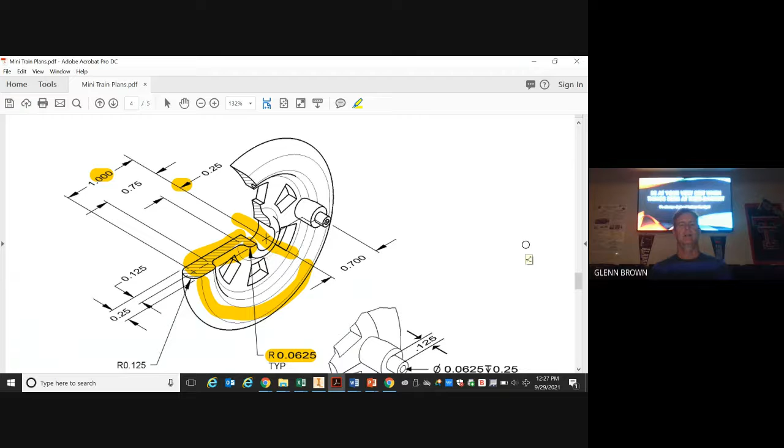We're working our way through this miniature train project, and I had a request to show the wheel, how to design or how to draw the wheel. When I first saw it, it looked complicated when I was first learning this, but it turns out it's not. Like everything else, there's just a few little tricks you got to figure out.

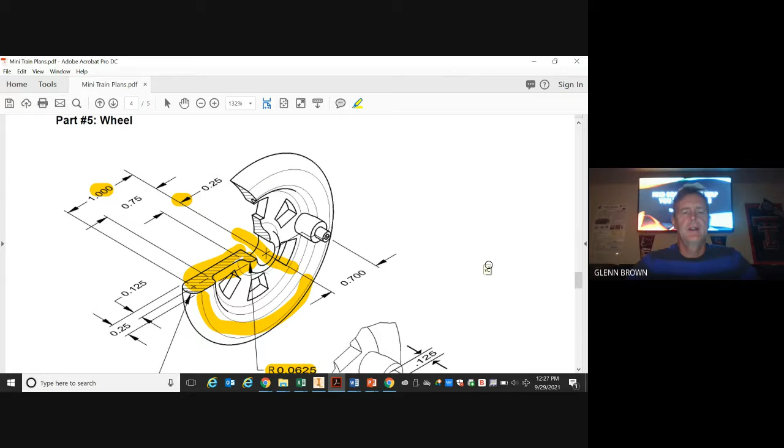So the first of those is how to draw it. Once again, when you're looking at things, you got to look at it and decide what the best way to draw it is. So on this one, you might say, well, I'll draw a circle and then I'll extrude it and then I'll cut these holes into it. And you could do that. You could spend a whole lot of time filleting and cutting this hole in and then copying that around.

But the most efficient way that I found was to use a revolve, just drawing this half of the wheel and then revolving it around. And so all you're going to do is just use lines and a circle and the fillet command. Nothing too tricky about that. All stuff that you've used in the past.

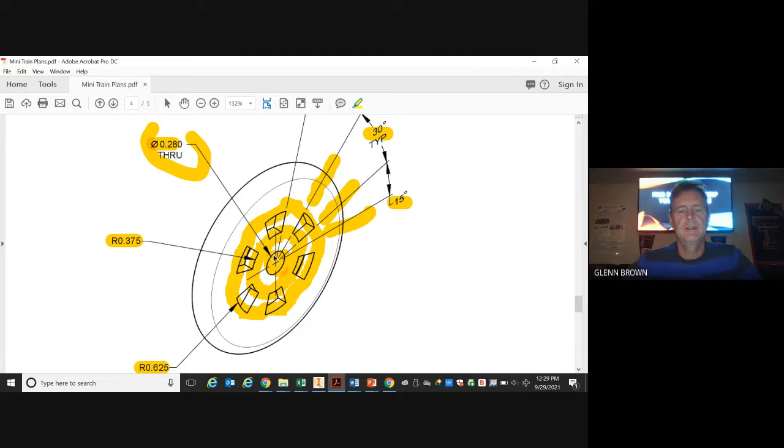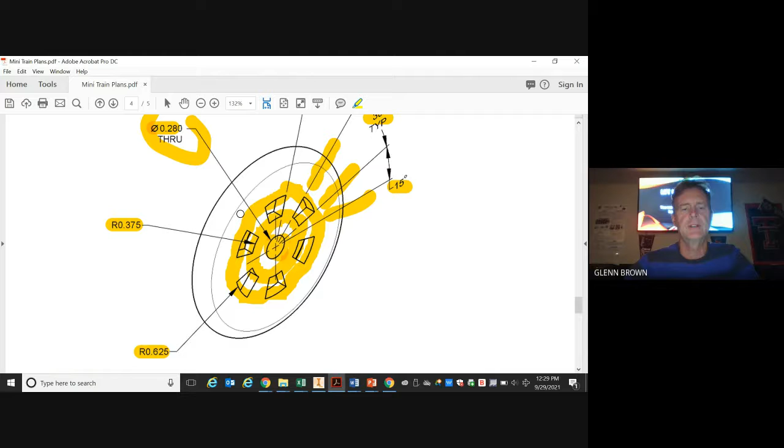One thing that you're going to notice here is when you start trying to draw this first line, there's no dimension telling you what the distance is there. In order to do that, you have to look further down here at the back of the wheel, and the back of the wheel shows that this hole is the same as this hole. So on the drawing, they give you the diameter. Remember, the circle with the line through it is diameter of 0.280. And they have a note there that it goes all the way through. So that's your measurement for the center line to the first line.

All right. So first we'll draw a line here, here, here. We'll draw a circle here. I like to just put some random lines in and then come back and dimension them, and then dimension that distance for the circle, and then draw in these two lines here, and then revolve. So let's get started. We'll do this in two parts. The first part will just be drawing the wheel. The second part will be drawing the slots and this hub for the linkage arm afterwards.

So first, like always, we'll go into Inventor. We're using Inventor here, but these techniques are very usable on other types of solid modeling software. So File, New, Standard IPT. We'll open up a new file now. So now we've got a new environment to draw our part in. As always, we're going to start with a 2D sketch, and we're going to choose our plane to draw in. So remember, top, front, right side.

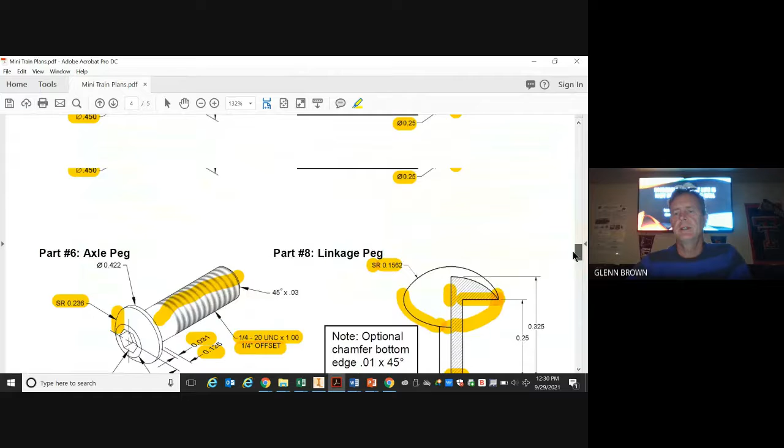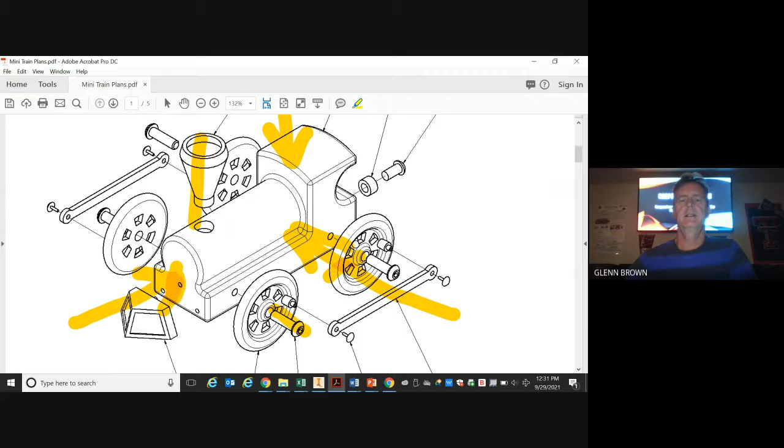We have to decide which plane to draw it in. So if we go back and look at the drawing, and we go up to the assembly, we see that the wheel is positioned this way on the train itself. So remember, we have front, top, and right side. Since we're just going to draw that one part right there and then revolve it, it looks like it'll be best for us to draw from the top view.

So we'll go back to our file. We'll click the top view. Remember that because of the coordinate system of Inventor, it typically turns 90 degrees when you click the top view, and you just have to go over here to the side and rotate it back to where it says top the way it should.

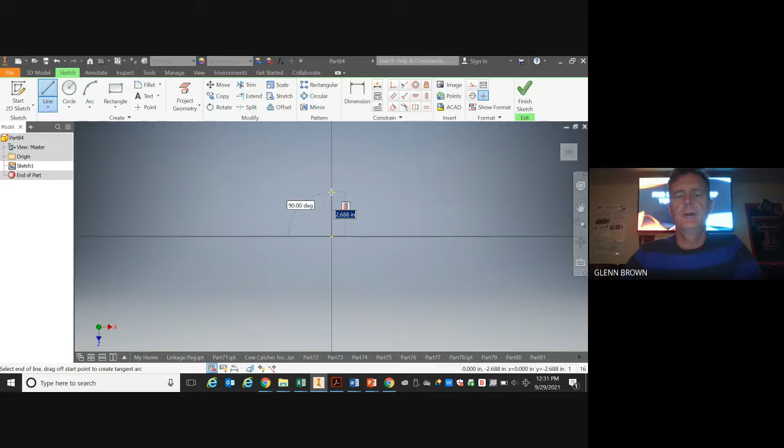All right, so now we're ready to go. So like I said, I usually just come in and I draw several random lines. I start at 0, 0, but the length is random. So I've got that one. That one will eventually be used for my revolution, my axis to revolve around.

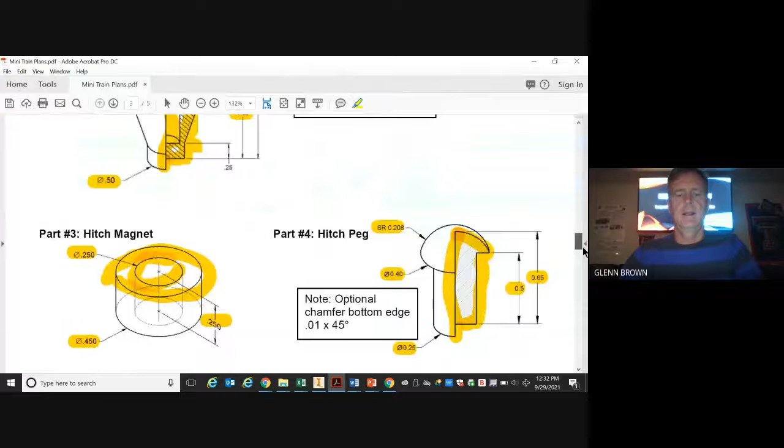Then I'm going to put another line in here. Right click and OK. And then I'm going to put one more. Right click OK. And then one more down here. Okay. After that, and these lines, I'm not dimensioning the length of them or anything. I'm just drawing these that are, if you look at the drawing, you can see that the overall width of this part is only going to be 0.25.

So any line that's greater than about 1 inch is going to be fine. So when you're drawing these lines, just draw them longer than 1 inch and you should be okay. All right, so now I'm going to draw a circle, and from the drawing we can see that this circle, this is a semicircle here, but we'll make that semicircle out of a complete circle, and you can see here that it gives the dimension of 0.25. That would be the diameter of the circle.

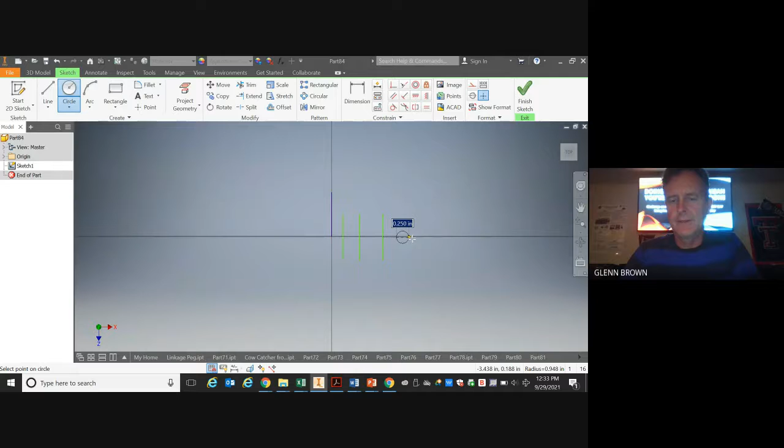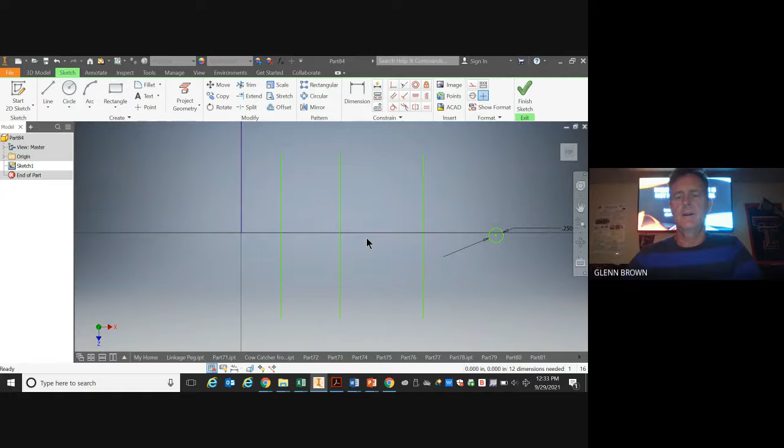So if I go back here, I've got my circle command. I come out here and just put my center on the axis here. And then I just come out and key in 0.25, because remember that Inventor draws circles in diameters and not in radius. So 0.25. All right, so now I've got all the things I need to take care of this first step. Now I'm just going to go in and dimension them.

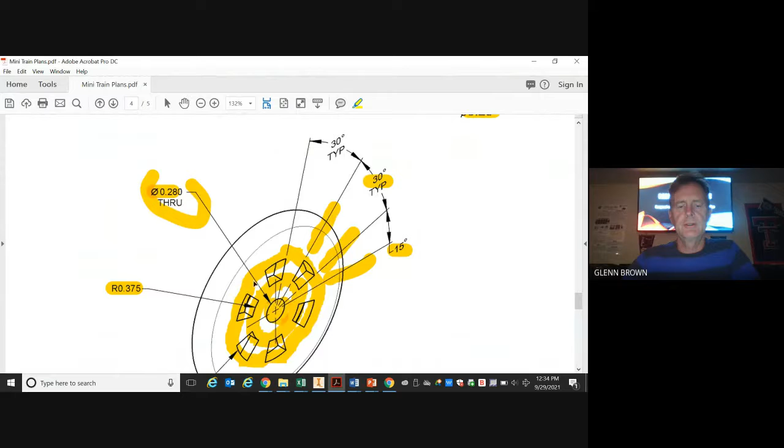So if we look at the drawing, remember what we said down here, that this hole that goes through at the center is 0.208. It's a diameter of that. So this distance here is going to be half of 0.208. So I'll dimension from the center line to that line. I'll make it 0.208 and then I'll divide it by 2, because we're only drawing half of the wheel, and then we're going to revolve it into its full measurement. So I've got that. Now I'm going to dimension the next one.

So the next one, some of my students make the mistake of dimensioning. They don't dimension from the center line. They dimension from the line we just drew. And so just make sure you're careful of that. Make sure that you notice that all of these dimensions, the 0.25, the 0.75, and the 1.0 that we're about to dimension, all those dimension lines are originating from that center line, okay? So let's go in and dimension our next one.

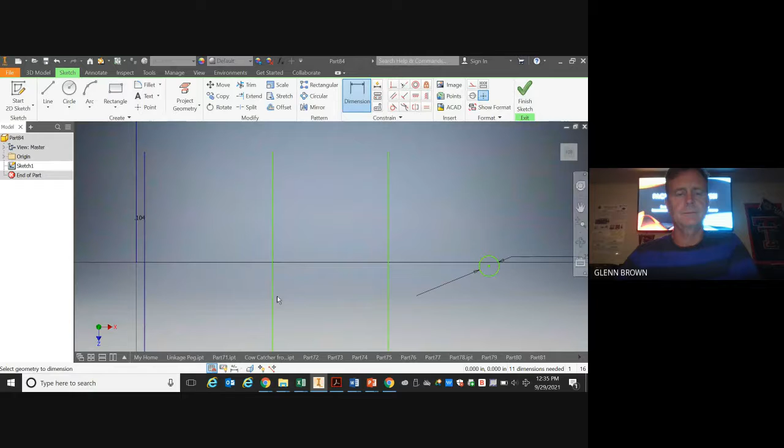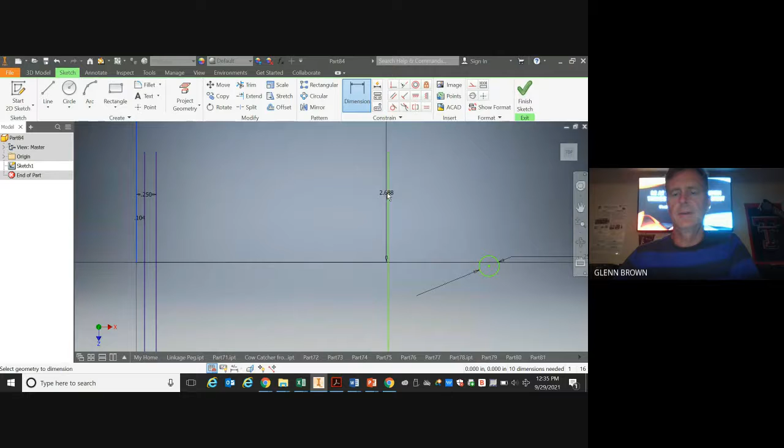So the next one will be from here to here, and that is going to be 0.25. And then the next one, looking at our drawing, will be 0.75, which will give us that edge there. So from the center out to here, 0.75. And then lastly, the circle.

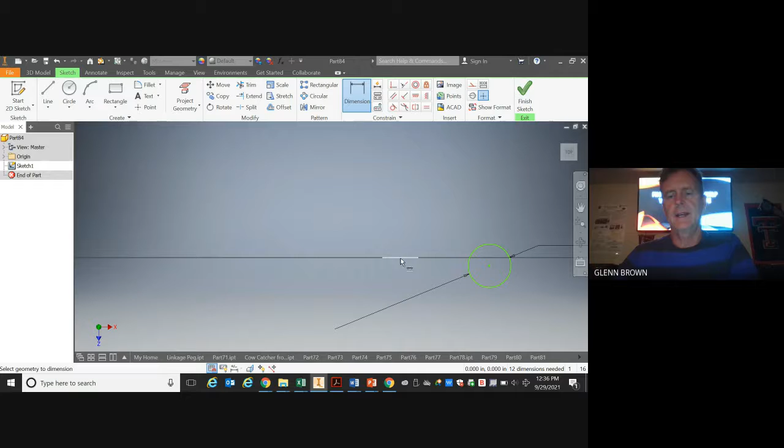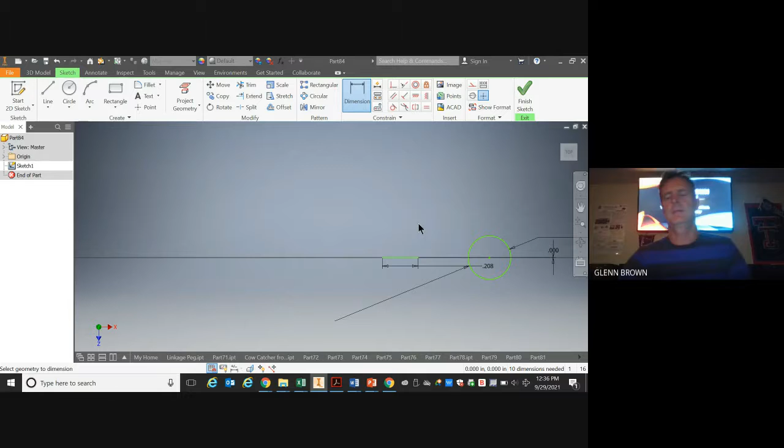Oh, and our circle, even though I tried, I did not get it on the axis. So for me, when I do that, I just go here, draw a line on the axis, and use a dimension from here to the center of the circle and make that 0. And then it moves it to there. Then now I can dimension it 1 inch from here to the center.

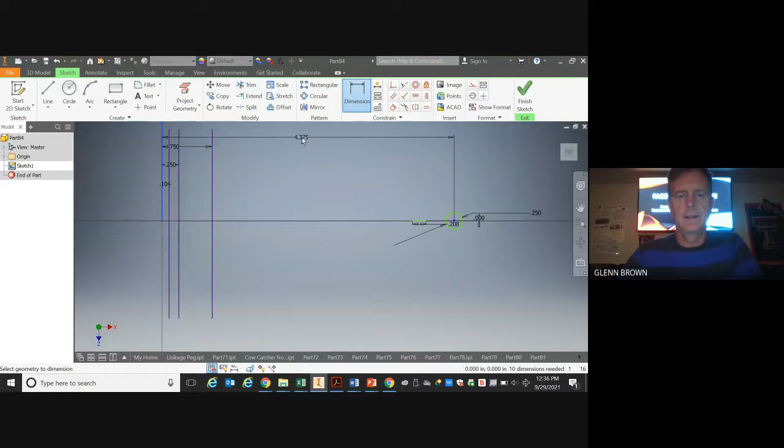So dimension, so from here to the center of that circle, I'm going to make that 1 inch. Okay. So now we have everything that we need for that part of the wheel. Now we're just going to finish out our general shape.

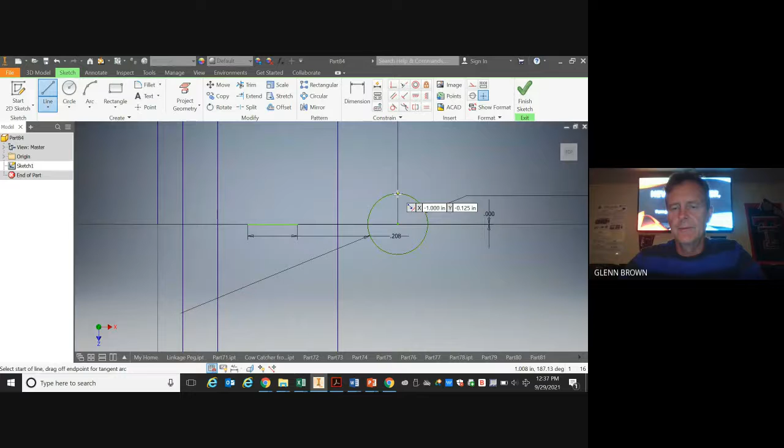So we're going to go back and get a line, and this is the empty space of the hole right here. So we don't draw any line in there. So we're just going to snap to the top of the circle and go in to this line here. Right click on OK. Then we're going to go from the bottom to this line here. And if you go a little past, it's no problem.

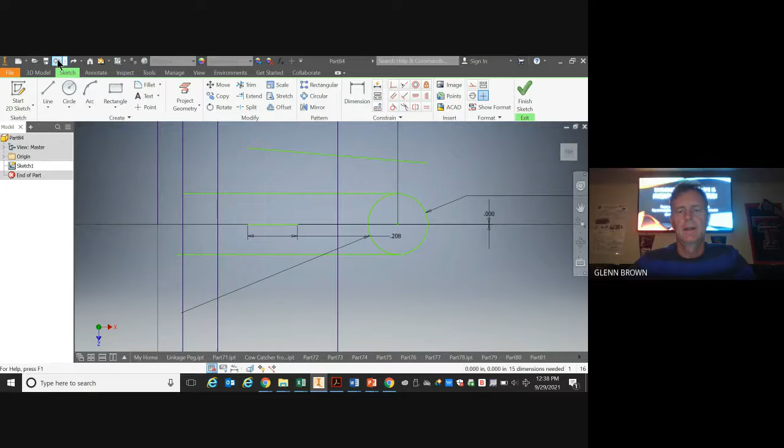If you draw that line and it ends up crooked, that's really no problem either, because you can just use horizontal or vertical constraint to pull it into where you want it. Okay. So now also, if you have an issue where you have something that goes over here, you can just trim that off. Okay, no big deal.

So next, we just want to create our shape. So we have this line here, we have our line going down the middle, which is going to be that line there. So now we just need to use trim and kind of clean up and find our shape within all of this. So there, we're going to go there and there. We're going to get rid of that. We'll get rid of that. We'll take that out.

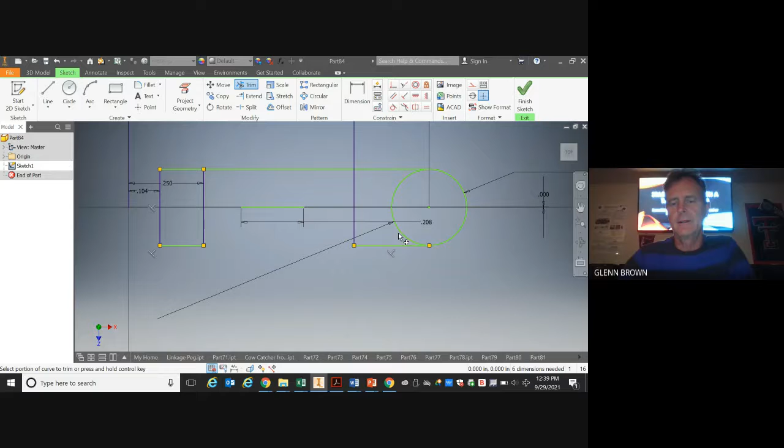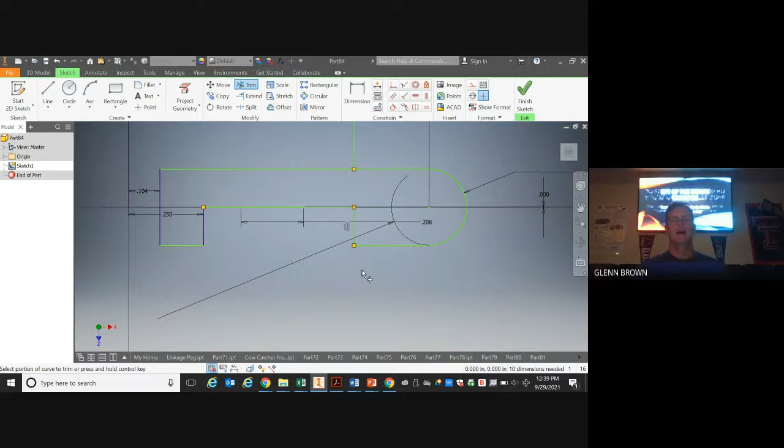So now we have this short line that's 0.208. That may give us a problem, but no worries. We just draw a line over top of it. Say okay. Now we can come in, trim away that, trim away that. And now we have the general shape of our wheel, okay?

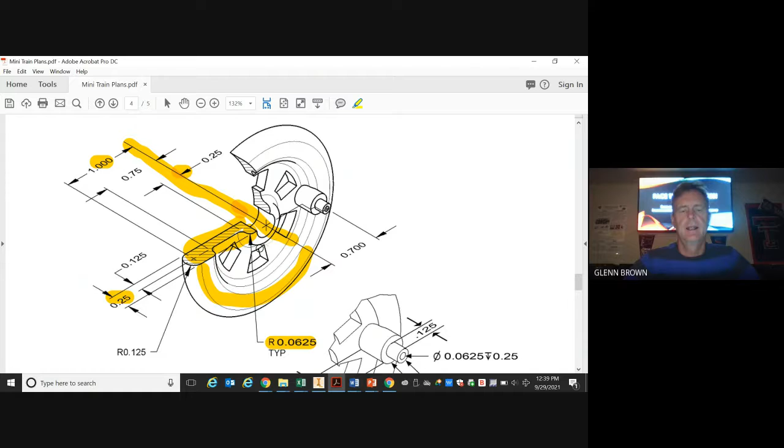Lastly, we want to round off these corners, okay? So if we look here, we've got our radius for the fillet, 0.0625. The TYP here stands for typical. That means every one of these curves here, every one of these fillets are going to be a radius of 0.0625.

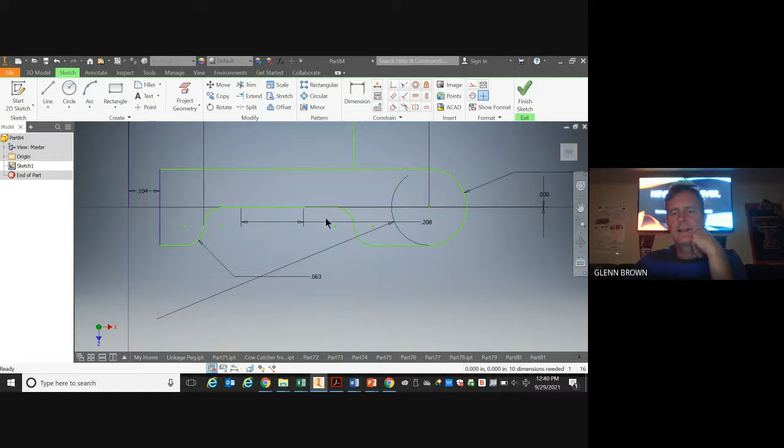So now let's go back, go to fillet, fill in our dimension 0.0625. Don't press enter, just leave it. And then now you just go choose either side of the corner that you want to fillet. We'll go there and there, we'll go there and there. Okay. And now we have the curve. So now we can get out of that. That looks really good. That looks like our good general shape. We can go back and go, yep, I feel good about that.

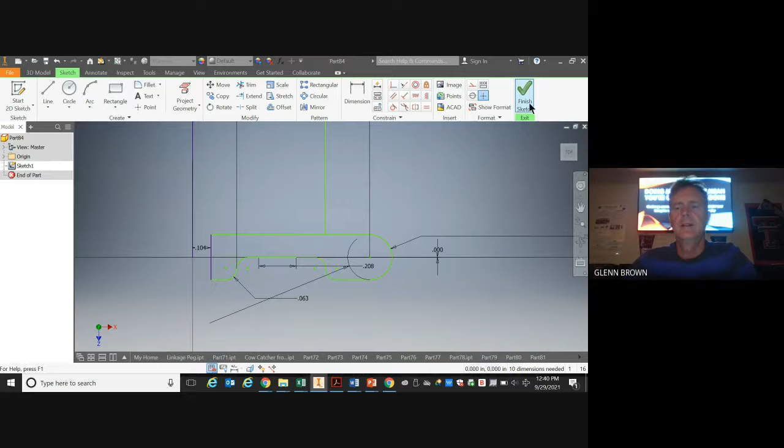So now all we need to do, like always, we finish our sketch. You may be saying, hey, Brown, what about the line there or that extra line that's in there? That is not going to make a difference, because when you finish your sketch and you come in and click revolve, the software is going to ignore those extra lines. So when you highlight it, see, I'm highlighting that closed loop. When I highlight it, it's going to just ignore those.

Then I'm going to tell it, hey, I want to show you what axis I want to use. So in an older version of Autodesk Inventor, you would just click the button for axis. If you're using a newer version, you click the red letters that say select axis, and then come over here and just select the first line that you drew. So remember, that line right there that I'm highlighting, that is our center line. That's that line there. So we want to revolve around that. So we're going to select that as our axis.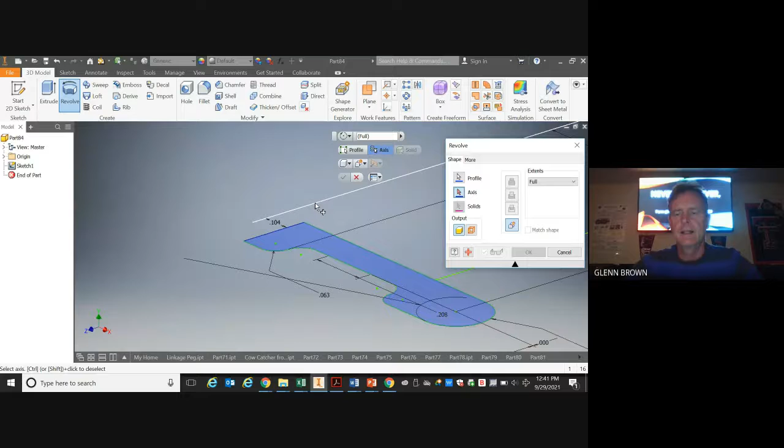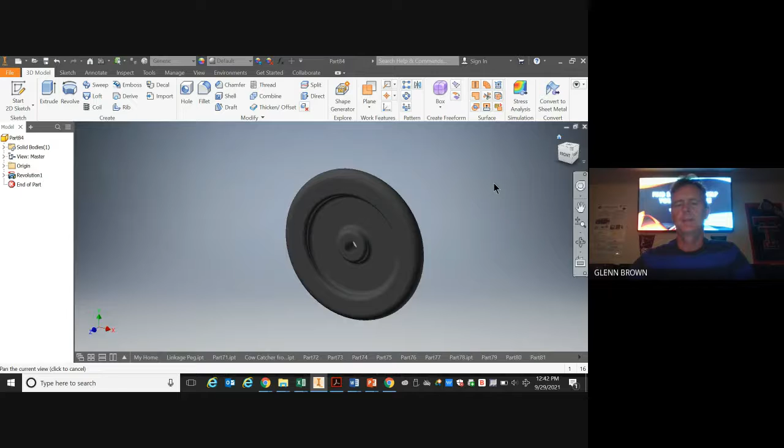Click that. It looks good. We'll zoom out, check it out. Looks good. Click OK. So that is the start of our wheel. So we'll call this part 1. And then we'll move on to part 2, where we'll put the slots in and we'll put the linkage hub on. All right.